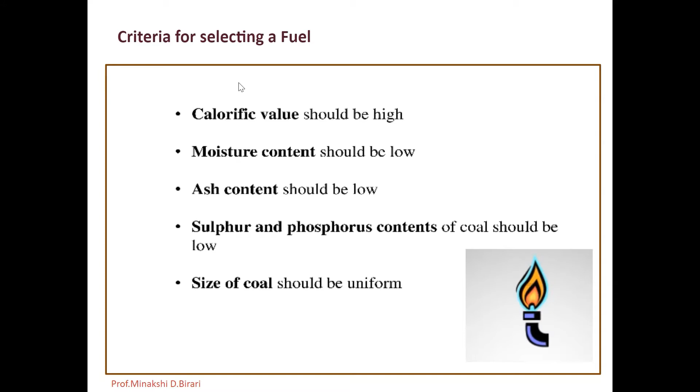So, calorific value should be high, moisture content should be low, ash content should be low, that means the percentage of non-combustible matter should be low. Sulfur and phosphorus content of coal should be low. Size of coal should be uniform. So, these are the factors of prime importance while selecting a fuel for a particular purpose.

In the previous lecture, we studied the properties of a good fuel. Now, let us see other properties of fuel. Each fuel has a definite ignition temperature value. So, what is ignition temperature? The temperature at which fuel catches fire and continues to burn without further heat is called the ignition temperature.

The ignition temperature is influenced by a number of factors such as nature of fuel, combustion environment, presence of moisture, size and shape of the experimental vessel, particle size and presence of foreign material, etc. The value of ignition temperature decreases due to the presence of moisture and foreign material. Ignition temperature is defined as the temperature at which fuel catches fire and continues to burn without further heat.

Second property, that is flash point. Flash point is the property of a liquid fuel like gasoline, petrol, kerosene, alcohol, etc. It is defined as the minimum temperature at which a sample of a fuel oil gives off enough vapor that catches fire but does not continue to burn in presence of air by a naked flame or electric discharge.

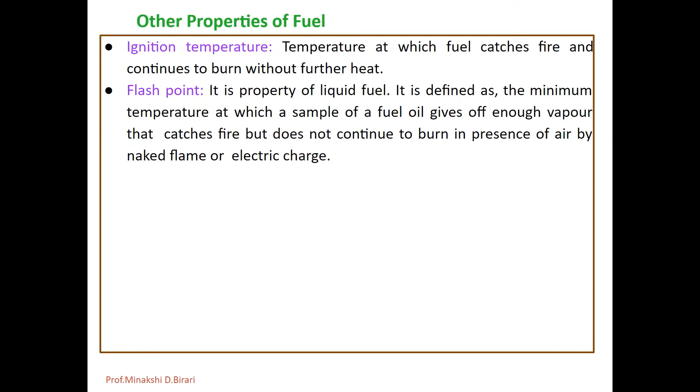Next one, fire point: the temperature at which oil vapors will catch fire and continue to burn. Both flash point and fire point are used to detect dissolved impurities much more volatile than the bulk of the oil.

Next one, coke number. It is defined as the amount of carbon deposited by a weighed sample of oil in a standard apparatus under a standard set of experimental conditions. Better grade lubricating oils have lower coke number. Different lubricating oils are used in the moving parts of an internal combustion engine. These oils produce free carbon on thermal decomposition in varying amounts. The oils producing free carbon in lower amounts are better.

The ability of oil to produce free carbon on thermal decomposition is given by the coke number. The amount of carbon deposited by a weighed sample of oil in a standard apparatus under a standard set of experimental conditions is called the coke number. Better grade lubricating oils are those which have lower coke number.

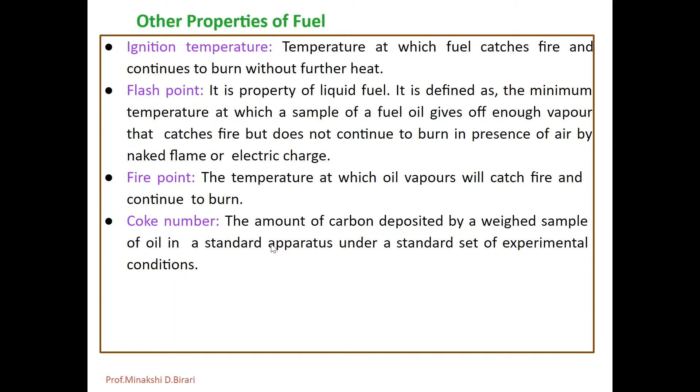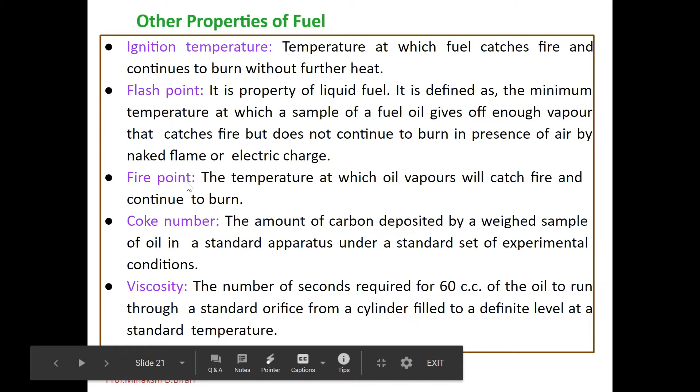In the USA, SUS, that is Saybolt Universal Seconds, is generally employed in the petroleum industry, and it is expressed as the number of seconds required for 60 cc of the oil to run through a standard orifice from a cylinder filled to a definite level at a standard temperature. So we should remember viscosity is the property of lubricating oils. So these are the properties of fuel: ignition temperature, flash point, fire point, coke number and viscosity.

Now let us see the cracking chemistry, cracking of petroleum, that is pyrolysis. In petroleum geology and chemistry, cracking is the process whereby complex organic molecules such as kerogens or heavy hydrocarbons are broken down into simpler molecules such as light hydrocarbons by the breaking of carbon-carbon single bonds in the precursors. The rate of cracking and the end products are strongly dependent on the temperature and presence of catalyst.

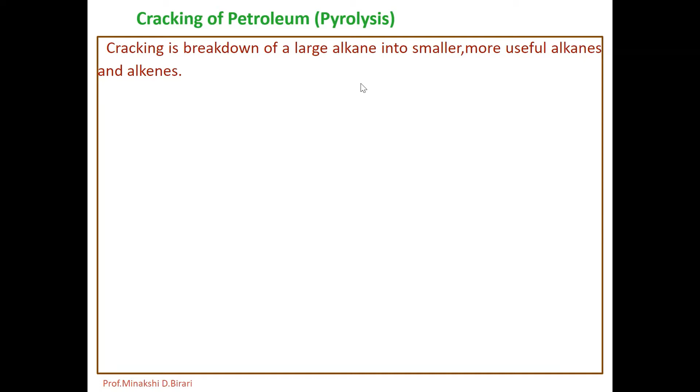So cracking is breakdown of a large alkane into smaller, more useful alkanes and alkenes. The term cracking is used in petroleum chemistry to describe any type of splitting of molecules under the influence of heat, catalyst and solvents, such as in the process of destructive distillation or pyrolysis.

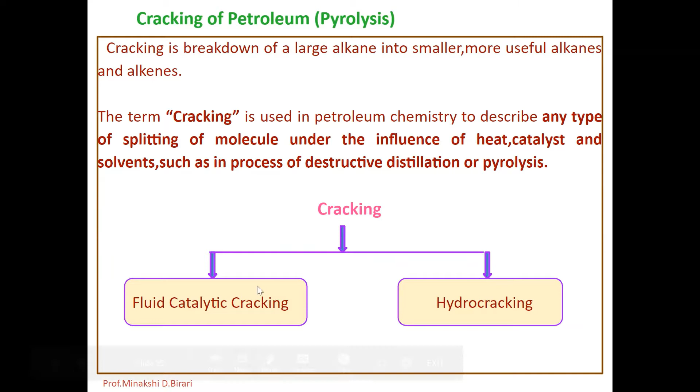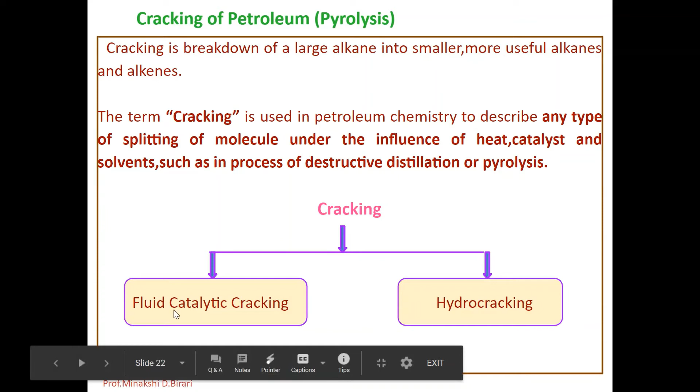Cracking is classified into two groups. First one, fluid catalytic cracking, and second, hydrocracking. Fluid catalytic cracking produces high yield of gasoline and LPG, while hydrocracking is a major source of jet fuel, diesel, naphtha, and also yields LPG. So cracking is classified into two groups, fluid catalytic cracking and hydrocracking. Let us see cracking chemistry.

A large number of chemical reactions take place during the cracking process, most of them based on free radicals. Computer simulations aimed at modeling what takes place during steam cracking have included even thousands of reactions in their models. So any type of splitting of molecules under the influence of heat, catalyst and solvents, such as in destructive distillation or pyrolysis, will be explained by cracking chemistry. So the reactions which occur in the cracking process are based on free radicals. So let us see the various steps involved in the cracking process.

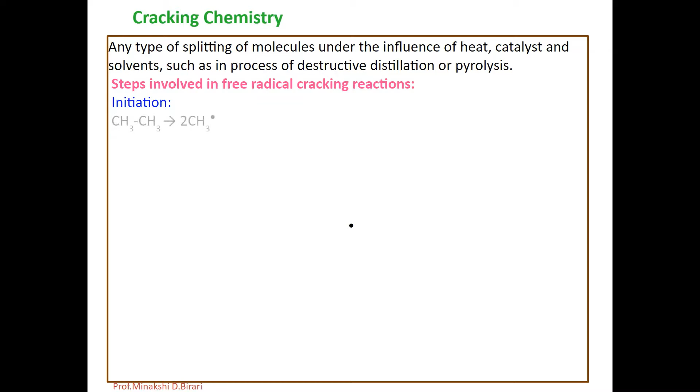First one, initiation. In these reactions, a single molecule breaks apart into two free radicals. So there is the starting material ethane that gives the formation of methyl free radicals. Two methyl free radicals are formed from a single molecule of ethane. So that is initiation. Second one, hydrogen abstraction.

In these reactions, a free radical removes a hydrogen atom from another molecule, turning the second molecule into a free radical. So this methyl free radical reacts with ethane, abstracts one of the hydrogens, and a new free radical is formed, the ethyl free radical. So we get methane and CH3CH2 free radical, the ethyl free radical. So this free radical removes one hydrogen from ethane and forms a new free radical, the ethyl free radical. Next one, radical addition.

In these reactions, a radical reacts with an alkene to form a single large free radical. These processes are involved in forming the aromatic products that result when heavier feedstocks are used. So the ethyl free radical reacts with an alkene, forming a single larger free radical. That is the radical addition reaction. Next one, termination.

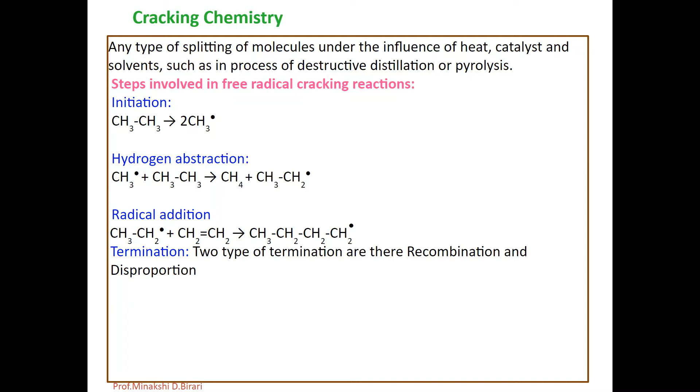In this reaction, two free radicals react with each other to produce products that are not free radicals. Two common forms of termination are recombination and disproportionation, where one radical transfers a hydrogen atom to the other, giving an alkene and an alkane. Whereas in recombination, the two radicals combine to form one larger molecule.

So termination is of two types. One is recombination: the two free radicals combine to form one larger molecule. And the second, disproportionation, where one radical transfers a hydrogen atom to the other, giving an alkene and an alkane.

Ethylene and ethane, formation of ethylene and ethane. So a large number of chemical reactions which take place during the cracking process are mostly based on free radicals. In free radical cracking reactions, there are four important steps: initiation, hydrogen abstraction, radical addition and termination. Termination is of two forms: recombination and disproportionation.

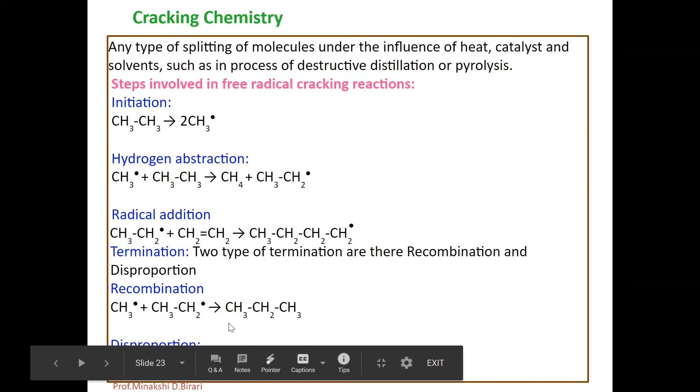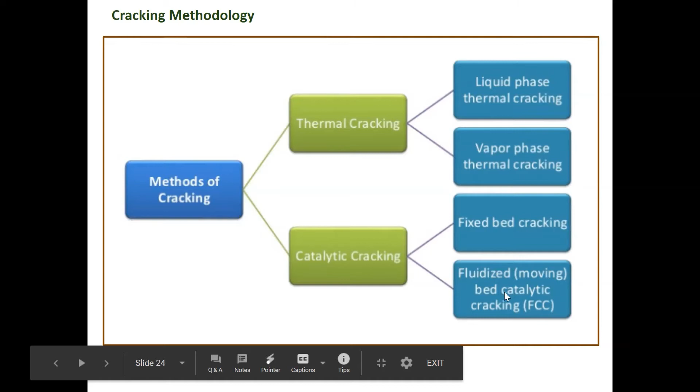Cracking methodologies. There are two types of cracking methods: thermal cracking and catalytic cracking. Thermal cracking is classified into two groups: liquid phase thermal cracking and vapor phase thermal cracking. Catalytic cracking is of two types: fixed bed cracking and fluidized moving bed catalytic cracking, that is FCC. Let us see in detail.

Thermal methods. Thermal cracking was the first category of hydrocarbon cracking to be developed. Thermal cracking is an example of a reaction whose energetics are dominated by entropy rather than by enthalpy in the Gibbs free energy equation. Although the bond dissociation energy D for a carbon-carbon single bond is relatively high, 375 kJ per mole, and cracking is highly endothermic, the large positive entropy change resulting from the fragmentation of one large molecule into several smaller pieces, together with the extremely high temperature, makes the T delta S term larger than the delta H term, thereby favoring the cracking reaction.

So homolytic fission takes place in thermal cracking. In thermal cracking, the actual reaction is known as homolytic fission, and it produces alkenes, which are the basis for the economically important production of polymers. So thermal cracking is an example of reactions whose energetics are dominated by entropy rather than by enthalpy.

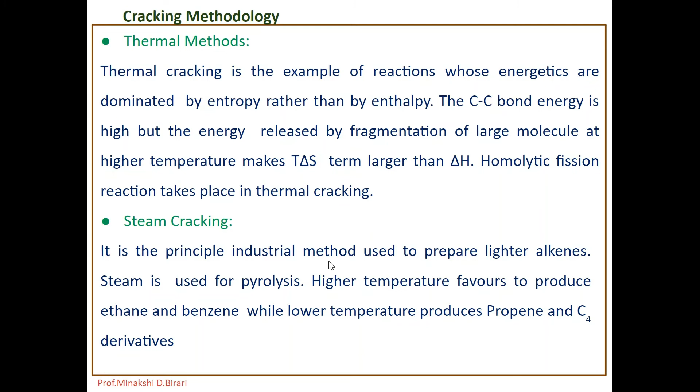Second one, steam cracking. It is the principal industrial method used to prepare lighter alkenes. Steam is used for pyrolysis. Higher temperature favors production of ethene and benzene, while lower temperature produces propene and C4 derivatives. Steam cracking is a petrochemical process in which saturated hydrocarbons are broken down into smaller, often unsaturated hydrocarbons. It is the principal industrial method for producing lighter alkenes, commonly olefins, including ethene and propene.

Steam cracker units are facilities in which feedstock such as naphtha, liquefied petroleum gas LPG, ethane, propane or butane is thermally cracked through the use of steam in a bank of pyrolysis furnaces to produce lighter hydrocarbons. The products obtained depend on the composition of the feed, the hydrocarbon to steam ratio, the cracking temperature and furnace residence time. So higher temperature favors ethene and benzene, while lower temperature produces propene and C4 derivatives.

The products depend on the composition of the feed, the hydrocarbon to steam ratio, the cracking temperature and furnace residence time. Light hydrocarbon feeds such as ethane, LPGs or light naphtha give product streams rich in lighter alkenes, and heavier hydrocarbon feeds give some of these but also give products rich in aromatic hydrocarbons.

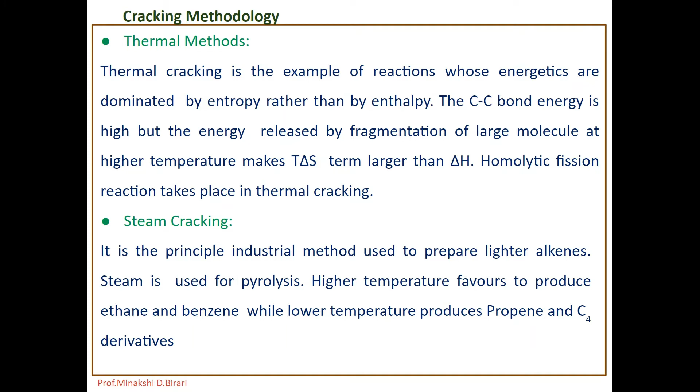Then catalytic methods. The catalytic cracking process involves the presence of an acid catalyst, usually solid acids such as silica, alumina and zeolites, which promotes heterolytic fission, that is asymmetrical breaking of bonds, which yields pairs of ions of opposite charges. There are two important catalytic cracking methods: fluid catalytic cracking and hydrocracking. First, fluid catalytic cracking, FCC. Low activity alumina catalyst particles were suspended in a rising flow of hydrocarbons. Cracking takes place using very active zeolite based catalyst in a short contact time vertical pipe called the riser.

Fluid catalytic cracking, FCC, is a commonly used process, and a modern oil refinery will typically include a cat cracker, particularly at refineries in the US due to high demand for gasoline. The process was first used around 1942 during the Second World War and employs a powdered catalyst. In FCC, preheated feed is sprayed via nozzles where it contacts extremely hot catalyst at 666 to 760 degrees Celsius. The catalyst vaporizes the feed and breaks it down into lighter compounds like LPG, gasoline and diesel. The catalyst hydrocarbon mixture is separated via cyclones, then the hydrocarbons are separated in a distillation column.

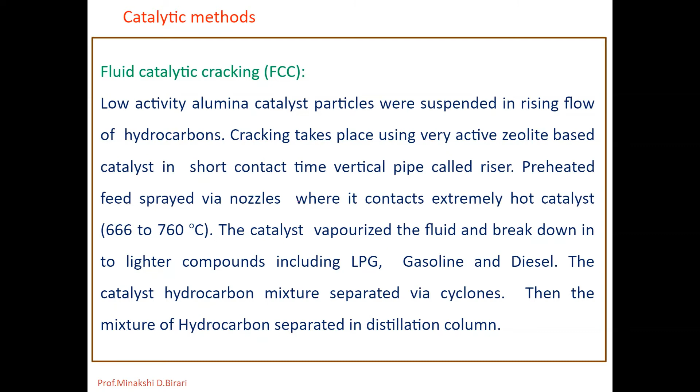Preheated feed is sprayed into the base of the riser via feed nozzles, where it comes in contact with extremely hot fluidized catalyst at 666 to 760 degrees Celsius. The hot catalyst vaporizes the feed and catalyzes the cracking reactions that break down the higher molecular weight oil into lighter compounds that may include LPG, gasoline and diesel.

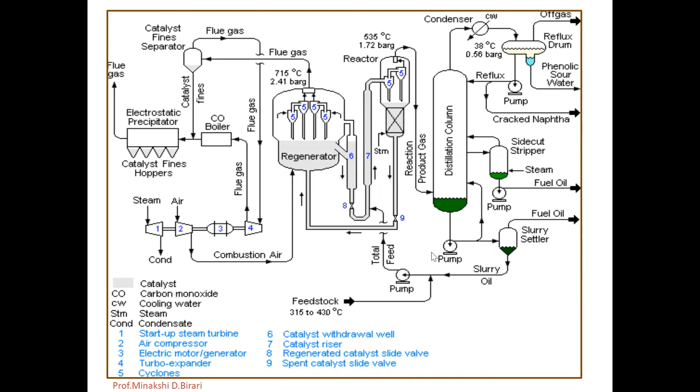So it is the schematic flow diagram of a fluid catalytic cracker. Now the next one, that is hydrocracking. Hydrocracking is a catalytic cracking process assisted by the presence of added hydrogen gas. Unlike a hydrotreater, where hydrogen is used to cleave or break carbon-sulfur and carbon-nitrogen bonds, hydrocracking uses hydrogen to break carbon-carbon single bonds.

That is, a hydrotreatment is conducted prior to hydrocracking to protect the catalyst in hydrocracking. The products of this process are saturated hydrocarbons depending on the reaction conditions, which range from ethane, LPG to higher hydrocarbons that will be obtained by using hydrocracking.

A bifunctional catalyst is used which can break carbon-carbon single bonds and add hydrogen. So hydrocracking is normally facilitated by a bifunctional catalyst that is capable of rearranging and breaking hydrocarbon chains as well as adding hydrogen to aromatics and olefins to produce naphthenes and alkanes.

The major products from hydrocracking are jet fuel and diesel, but low sulfur naphtha fractions and LPG are also produced. Hydrocracking is very common in Europe and Asia because those regions have high demand for diesel and kerosene.

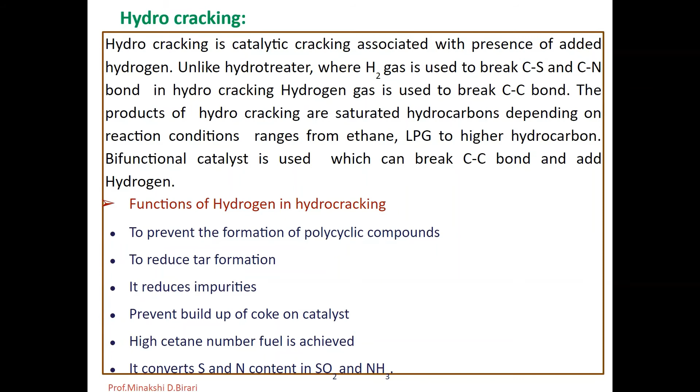Now octane number, or also octane rating of a fuel. So what is octane rating or octane number? Octane number is a standard measure of the performance of an engine. Use of petrol with a lower octane number may lead to the problem of engine knocking. Edger in 1972 observed that straight chain alkanes knock badly but branched chain alkanes knock very little.

Thus, the relative anti-knock tendency of a fuel is generally indicated by its octane number. So, the efficiency of a fuel is rated by giving it a certain octane number. Octane number is an index of knocking of a gasoline in the internal combustion engine. The octane number of isooctane, or 2,2,4-trimethylpentane, is 100 and that of n-heptane is 0. The octane rating is a measure of the resistance of petrol to engine knocking.

Some vehicles require a high octane fuel and many vehicles require a lower octane rating fuel. Many vehicles less than 10 years old can run on lower octane rating fuel safely but get better economy and power from higher octane fuels.

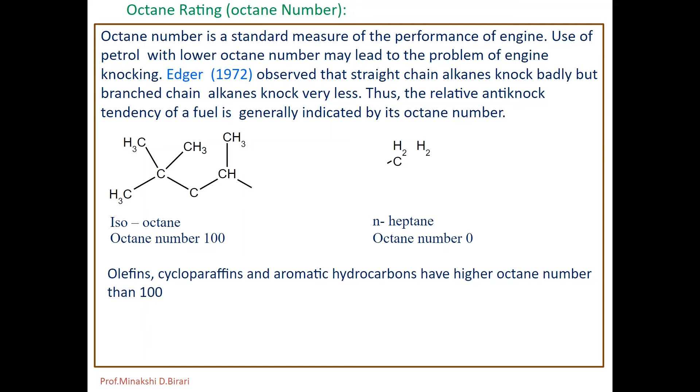So, the octane number is a measure of the knocking properties of a fuel. In other words, it is a measure of how difficult it is for the fuel to self-ignite before the spark plug fires. A high octane number indicates a higher self-ignition temperature, meaning that this fuel will withstand higher compression ratios before self-igniting.

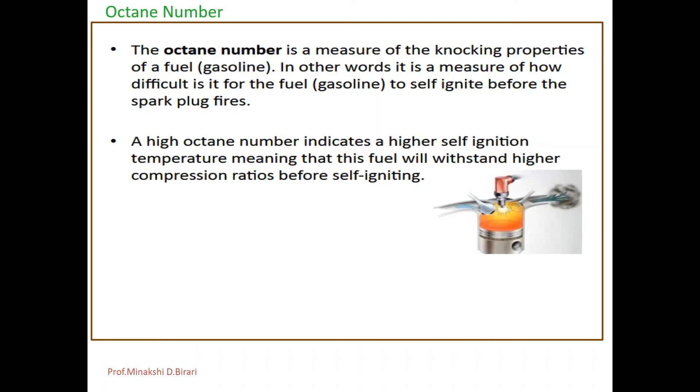Octane number is determined by measuring the knocking value of the fuel compared to that of a mixture of n-heptane and isooctane. So the octane number of isooctane is 100 and n-heptane has the octane number 0. So it is between 0 and 100, where an octane number of 90 is for the same knocking properties as a 90% isooctane and 10% n-heptane mixture.

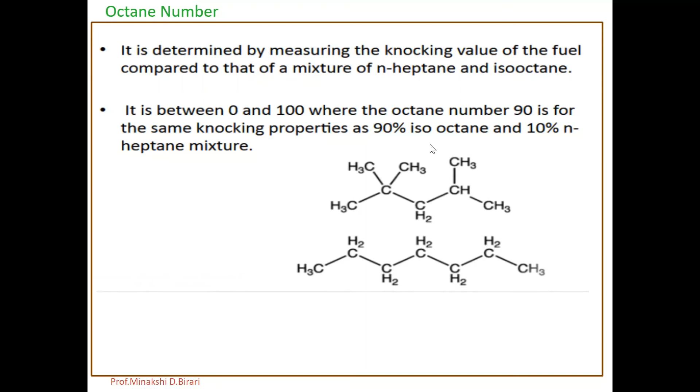The pump octane number is the one which is used by consumers and it is the average between the two. The octane number can be improved by using additives to gasoline such as tetraethyl lead, that is called TEL, and lead chlorides and oxygenates. Also MTBE, that is methyl tertiary butyl ether, which will be discussed later.

You should remember that anti-knock additives like tetraethyl lead, lead chlorides and oxygenates are useful, which improve the octane number. If the use of additives improves the ignition properties beyond pure isooctane, the octane number will be higher than 100.

There are two types of octane number. The motor octane number, which is at 900 rpm at severe conditions, while the research octane number is at normal conditions, that is 600 rpm. The second is usually higher due to the higher efficiency of the engine at lower rpm.

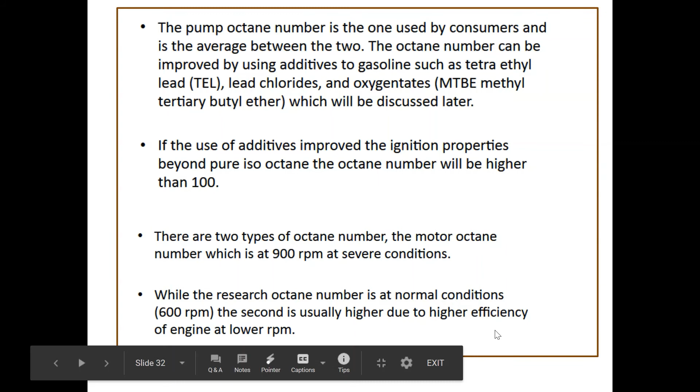So the octane number can be measured by comparison of the ignition property of the fuel with that of pure isooctane with different TEL additives. The typical anti-knock agents which are used are tetraethyl lead (TEL), ferrocene, iron pentacarbonyl, toluene, isooctane, like that. Or using the performance number, which is the ratio of the knock limited power of the fuel to that of pure isooctane. Then this ratio is converted to octane number by a simple equation.

So the different methods are there. By using them we can improve the octane number and also the knocking property of the engine. So octane number is an index of knocking of a gasoline in the internal combustion engine, and the octane rating is a measure of the resistance of petrol to engine knocking.

Engine knocking can damage the engine quite quickly, so some vehicles require high octane fuel, and many vehicles less than 10 years old can run on lower octane rating fuel safely but get better economy and power from higher octane fuel. The octane number is measured in a test engine and is defined by comparison with the mixture of 2,2,4-trimethylpentane, that is isooctane, and heptane, which would have the same anti-knocking capacity as the fuel under test.

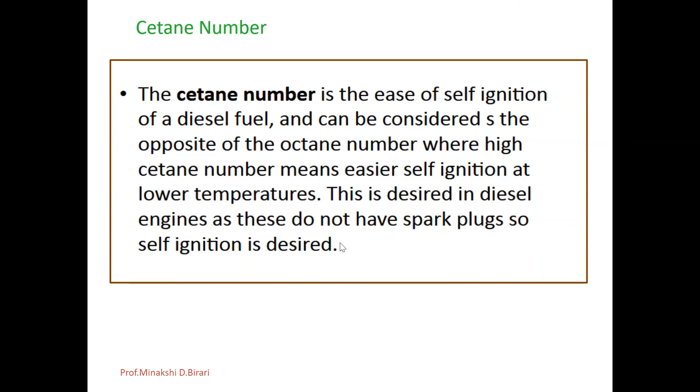So in a particular diesel engine, higher cetane fuels will have shorter ignition delay periods than lower cetane fuels. Cetane numbers are only used for relatively light distillate diesel oils. It is represented by the percentage of pure cetane in a mixture of cetane and alpha-methylnaphthalene that has the same knocking properties, that is ignition quality, of the fuel.

The knocking properties in both the cetane and octane number are measured in a special test engine which has a single cylinder, a multi-bowl carburetor for different mixtures of a fuel, and a pressure gauge to measure the intensity of the knock. Therefore, higher cetane fuel usually causes an engine to run more smoothly and quietly. So, the cetane number Cn is a measurement of the combustion quality of diesel fuel during compression ignition. It is a significant expression of diesel fuel quality among a number of other measurements that determine overall diesel fuel quality.

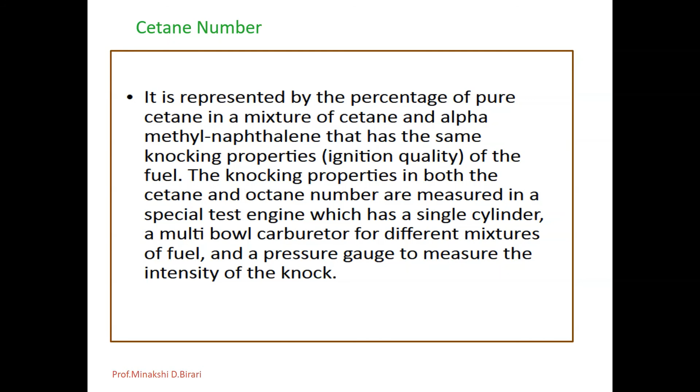Flash point. The flash point of a volatile material is the lowest temperature at which it can vaporize to form an ignitable mixture in air. Measuring a flash point requires an ignition source. At the flash point, the vapor may cease to burn when the ignition source is removed. A lower flash point indicates higher flammability.

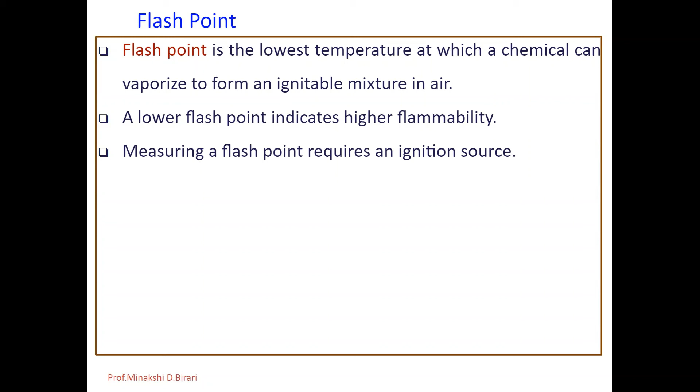The flash point is a descriptive characteristic that is used to distinguish flammable liquids such as liquid fuel from combustible liquids. It is also used to detect the fire hazards of liquids. For example, liquids which have flash point less than 37.8 or 60.5 degrees Celsius, depending on the standard that is used, are called flammable, whereas liquids having a flash point above that temperature are called combustible.

The flash point of a flammable liquid is the lowest temperature at which there will be enough flammable vapor to ignite when an ignition source is applied. So, at the flash point, the vapor may cease to burn when the ignition source is removed. So, it is mainly used to distinguish flammable liquids from combustible liquids and non-flammable liquids.

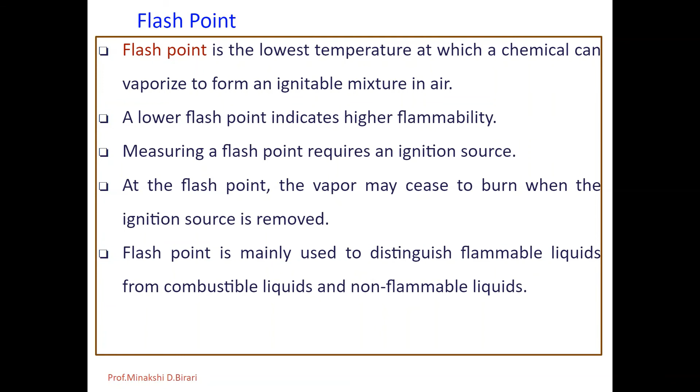So already I have explained that, depending on the standard that is used, liquids with flash point less than 37.8 or 60.5 degrees Celsius are called flammable, whereas liquids having a flash point above that temperature are called combustible. So the flash point of a volatile material is the lowest temperature at which it can vaporize to form an ignitable mixture in air.

So in today's lecture we have studied different properties of fuel like ignition temperature, flash point, fire point, coke number, cetane number, octane number, like that, and also cracking chemistry or cracking methodologies in detail.